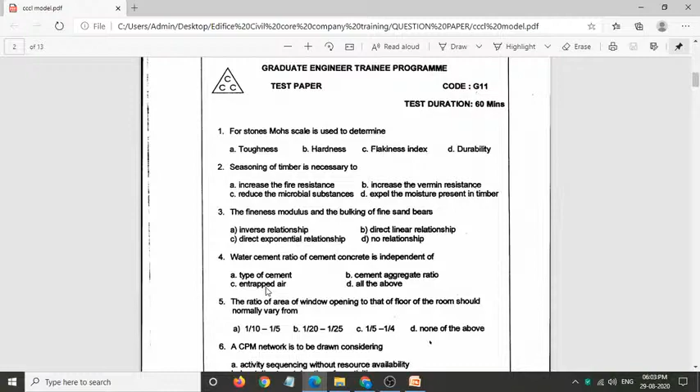So in the written test, I'll show you the company's question papers. They will have multiple choice questions. It is company to company - they will have different patterns, it won't be the same.

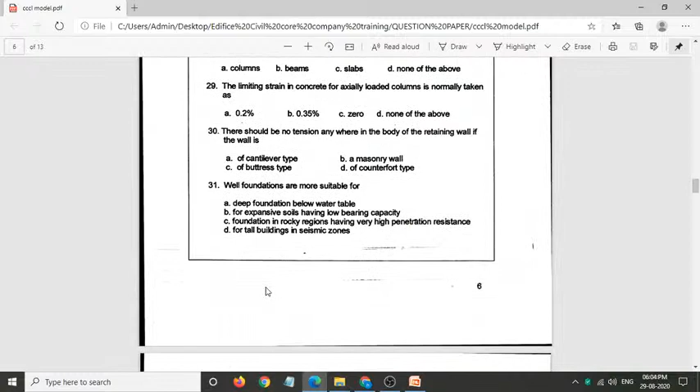So they focus the questions on the type of work they do - that's the main thing you must see. Whatever type of job the company mostly does, they will have more questions in that area. So suppose they're mainly working on irrigation projects, they will have more questions from irrigation and soil structures.

And if you are working on geostructure projects like metro projects, bridge construction works, tunnel boring - for this type of function, soil and foundation will be given most importance.

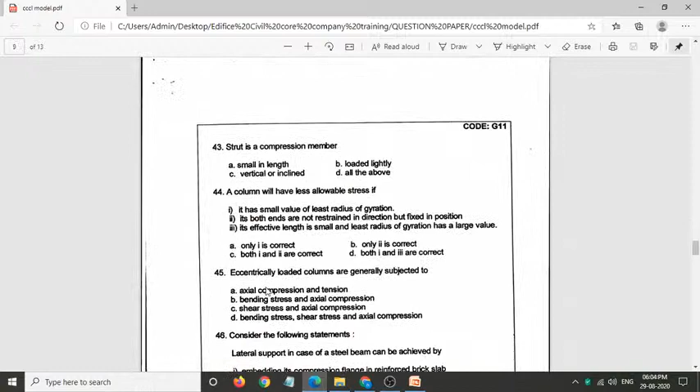So based on this company specification, there will be weightage. So first thing, if you want to get placed into a company, you have to clear the written test. So the first part of the training, we are going to see how to clear the written test.

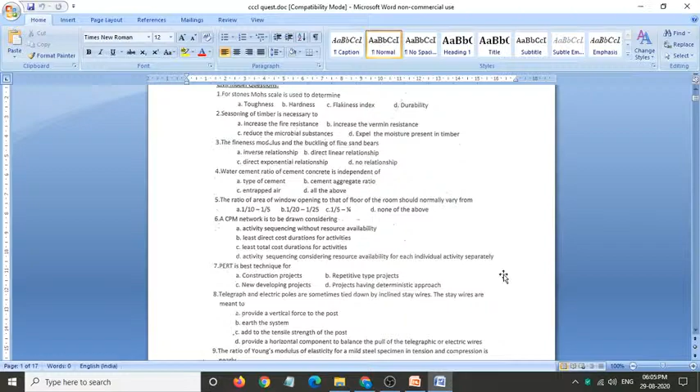What are the things you are going to have to study? So I am showing the model question papers, and these types of questions we will be discussing in further classes also. Objective questions will be asked.

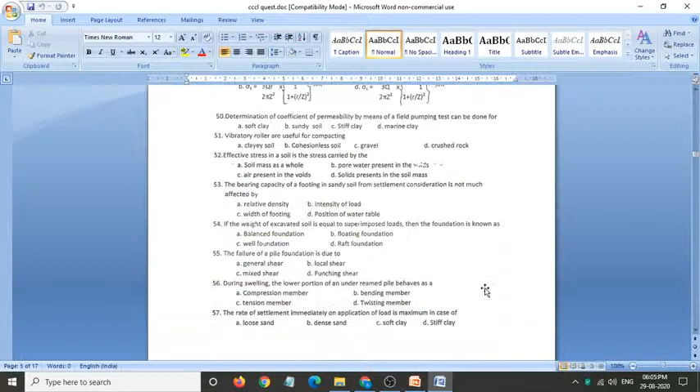Some questions will be direct questions. If you are having 30 or 40 minutes of written test time, there will be direct questions, not much complicated. There will be technically simple answers only. Sometimes you may have one, two, or three problematic questions also, which you have to solve using a formula in one or two steps. So this is one kind of question.

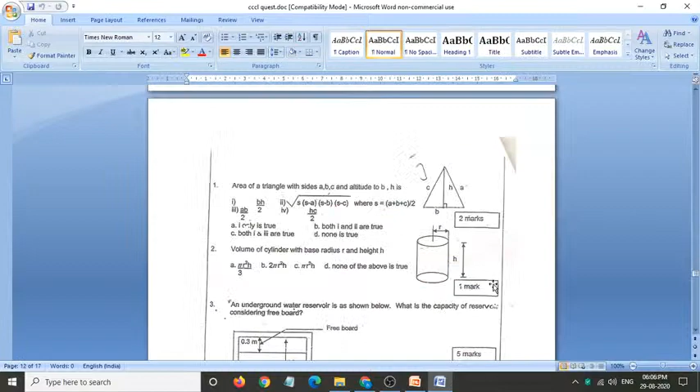Some companies will have around 1 to 1.5 hours. Some companies will have a system test also. I will show you what are the tests and what companies - how their selection process will be, we'll see now. These are the important questions also, frequently asked questions, and some companies' question papers are also available here.

So this is Shapoorji Pallonji's question paper. Why we are showing this before means, you must know the importance of technical subjects, because based on your technical understanding only they will be recruiting. The companies mostly will recruit the candidates who are having very good technical knowledge.

So whoever is strong in foundation, that is basics, only he can able to clear the questions. This is a filtration process. So first round is a filtration process, then another round is another filtration. So they will filter and select the best candidate for the company.

First thing, now we are going to see the pattern of the companies. We have broadly 7 categories, splitted into sectors. In the first sector, we are going to see the recruitment pattern for the service based company. When comparing with IT companies, civil industry also has service based companies, then consultant companies, then product based companies. So in service based companies, nothing but contracting companies.

So these contracting companies, first thing is Afcons Infrastructure. It is allied, a sister concern of Shapoorji Pallonji. So their exam pattern is: first there will be a written test, then a group discussion as second round, third round is a technical round, fourth round is HR round, and the company does not provide any bond.

Then the question paper pattern. Quants will have 15 questions, English will have 20 questions, logical reasoning 15 questions, technical aptitude 15 questions, and technical core 60 questions. Totally you will have 125 questions. Time allotted is 70 minutes, so in 70 minutes you have to complete 125 questions.

It will be a very short duration, not even a minute per question. So the questions will be somewhat easy, most will be direct. Some questions require solving, using formulas. So it will be very tough to complete in this shorter duration. You need to practice more, then only you can clear this sector.

The main areas: strength of materials 5 questions, structural analysis 5 questions, design of steel structures 8 questions, RCC 8 questions, pre-stressed concrete 5 questions, construction materials 5 questions, construction techniques and management 5 questions, estimation and costing 8 questions, soil and foundation 8 questions, surveying 8 questions. So you will get around 65 technical questions.

From the technical part, 60 questions you will get.

Then for the Megha Engineering and Infrastructures Limited companies, the written pattern is also the same. Written test, technical, HR - there is no bond. The salary package is between 15,000 to 25,000.

The selection criteria is you should have a CGPA of 6. In the written test they will ask only technical questions - 45 technical questions, to complete in 40 minutes. It will be slightly difficult, but most questions will be direct with some twist. You must know the concepts well, then it will be easy to solve these questions.

Then the important topics for the technical area: strength of materials 4 questions, structure analysis 4 questions, DSS 4 questions, RCC 4 questions, pre-stressed concrete 2 questions, construction materials 4 questions, construction techniques and management 5 questions, estimation and costing 3 questions, soil and foundation engineering 5 questions, surveying 5 questions.

So these are important topics. Most companies will have similar main topics, but you have to check each and every part, each and every question you must read, then only it will be very important. You must focus on what are the repeated questions and what particular area they are asking questions about. Those questions we will be discussing in a later stage, so it will be useful for your placement drive.

Then the second section is PMC, consultancy companies.

Why we are giving importance to this pattern is, based on the pattern only you can prepare these questions, or else it will be very difficult. If you are very strong in the technical area but don't prepare for quants or communication skills in English and logical reasoning, you will not be selected because of that. So there is a sectional importance for them. Part A will be quants, part B will be technical, so there will be sectional marks. Based on the sections they will be selecting you, so you should give importance to both sections.

Important areas: strength of materials, structural analysis, design of steel structures, RCC, pre-stressed concrete, construction materials, construction technique and management. Here they give more weightage for construction technique and management, estimation and costing, soil and foundation, surveying. You must be very careful because some companies will have a different criteria of selection, giving importance to other topics also. So you must be ready.

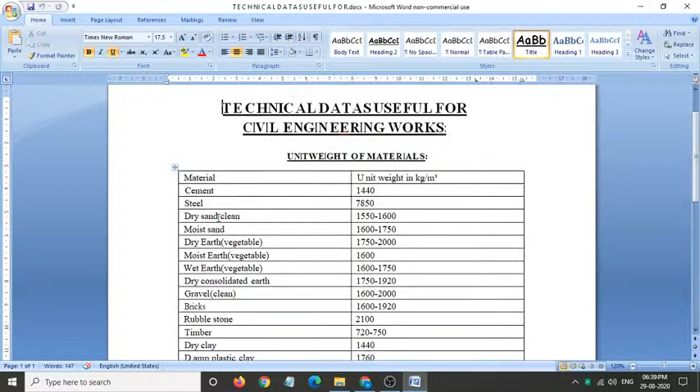For cement, its unit weight is 1440, steel is 7850. These two questions are very important, most of the time they will ask these questions, sometimes in the written test, sometimes in the interview. Surely they will ask: what is the unit weight of cement, what is the unit weight of sand?

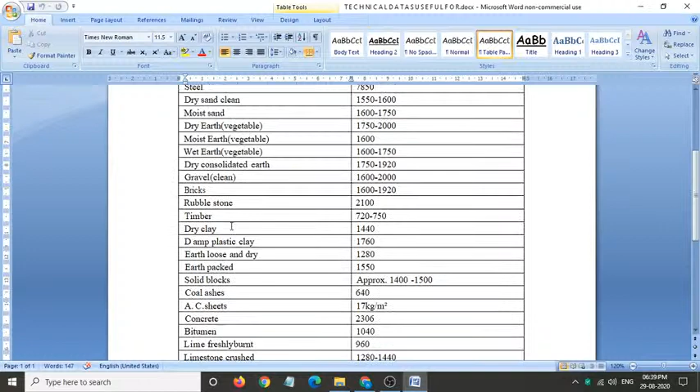Some other values for RCC, steel, solid block you can memorize. For plaster of Paris, you must know 800. For brick, the unit weight is 1600 to 1920. Moist sand is 1600 to 1750, dry sand is 1550 to 1600. Why am I specifically mentioning 4 to 5 items alone? These questions will surely be asked in the interview process, so you must be very thorough with them.

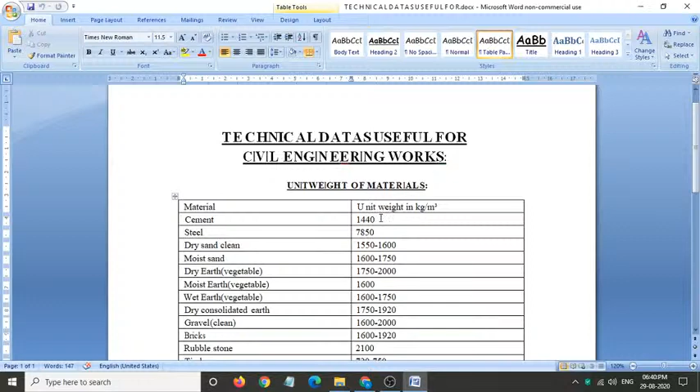If you are not thorough with these values, the technical person, the project manager or senior manager interviewing you will focus on whether you know how to do estimation. By knowing this only we can calculate the values. In the next slide we will see how to calculate the ratios for cement and sand, what quantity is needed. For those things we will be using this unit weight, based on which we can calculate the weight of cement, sand and all. So it's very important.

Next thing I am going to show is an important parameter.

Okay, basics. I'm giving this as a basic title because even if you are going to work at the site, or in an architect office, interior office, or structural office, you must know these notations and commands.

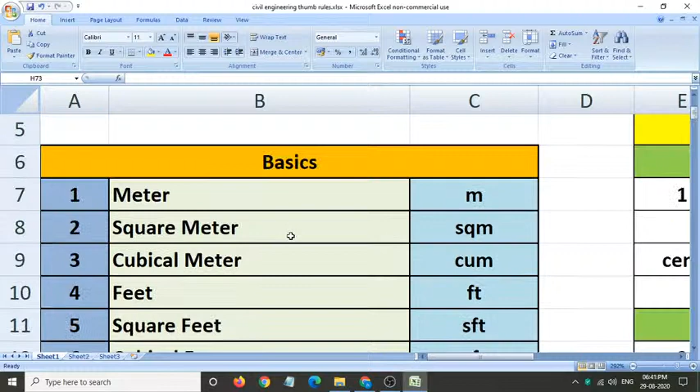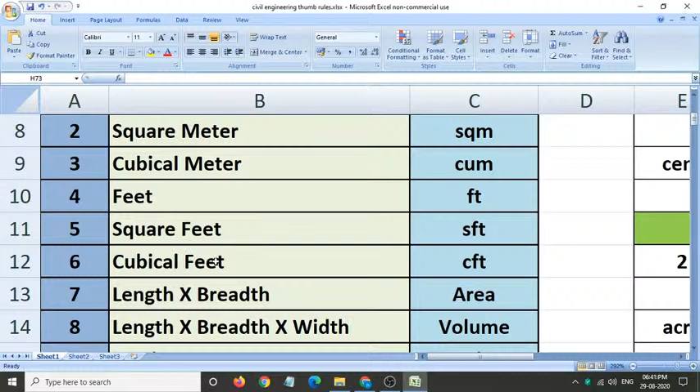Meter notation is M, square meter is SQM, cubic meter is CUM, feet is FT, square feet is SFT, cubic feet is CFT.

You must know the formula for calculating area, length into breadth, and for calculating volume, length into breadth into width. We are not using integration or differentiation for civil applications. We will be using simple addition, subtraction, multiplication only for doing our building works. If you understand the concept, it is very simple and easy.

Sand will be measured in units. Coarse aggregate, that is jelly, 12mm jelly or 20mm jelly or 40mm jelly, is mentioned in units. Random rubble stone is also measured in units.

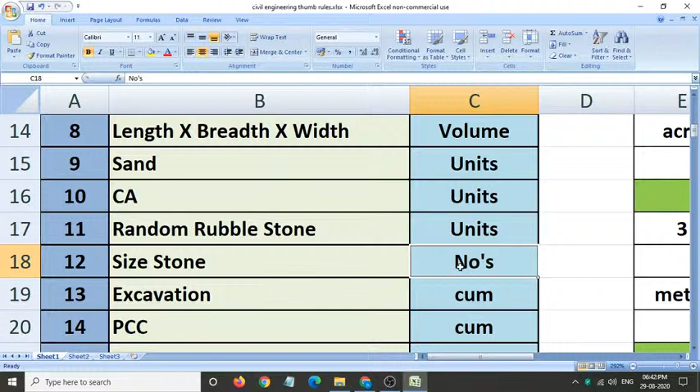Size stone alone will be in numbers, so it is an important one, it will be calculated in number. Excavation is cubic meter, PCC cubic meter, RCC cubic meter, earth filling cubic meter, shuttering square meter, brickwork 9-inch cubic meter.

Brickwork 4.5-inch brick wall, that is partition wall, will be in square meters. This measurement unit is very important. During the written test or technical interview, sometimes they may ask what is the unit of 9-inch brick wall or 4.5-inch brick wall, so you must be very clear.

Sometimes in the interview they will ask you to draw a plan, showing the partition, or they will ask the unit also. These are the important terms you must memorize, because when you enter the field these are the things you must know. Based on this, you can know the unit of measurement.

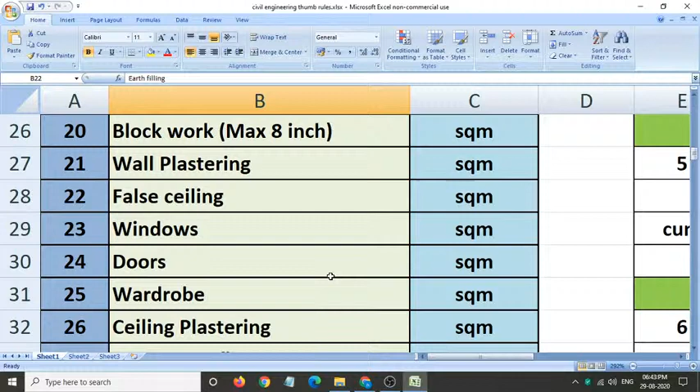Suppose wall plastering, the unit will be measured in square meters. False ceiling square meters. Windows, doors will be taken in square meters. Wardrobe square meter. Ceiling plastering square meter. Waterproofing work square meter. Core cutting work will be done in numbers.

Wall putty work square meter. Primer square meter. Internal painting square meters. External painting square meter. Wall tile work square meter. Floor tile work square meter.

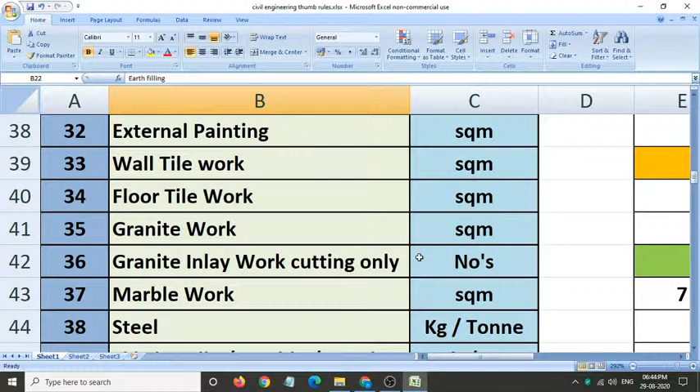Granite work square meter. Granite inlay work, that is cutting using the CNC machine where we do inlay work with designs like flower type or some other design - that charge will be calculated in numbers. Marble work in square meters.

Steel is measured in kilogram or tonnage. Skirting tile, whether in tile, marble or granite, will be in running feet or running meters. For windows, for fresh wood when we get it from the market, it will be calculated in CFT or cubic meter.

Reclaimed wood is nothing but used wood which is already well seasoned. It is obtained from the old market, and calculated in tonnage. The benefit of reclaimed wood is that it is already seasoned - there won't be any bend or cut, so it will be very useful, and there won't be any wastage.

But with fresh wood, the difference is we have to season it first. After seasoning, we have to cut the wood using a cutting machine, and sometimes the wood may bend or crack. Sometimes the trunk may be hollow inside in some part, so there may be losses.

But reclaimed wood is not like that. It is solid wood which was already used in older houses. After demolishing, they are sold in the old market, and from there we can use it. Nowadays architects prefer to use reclaimed wood to also save our environment.

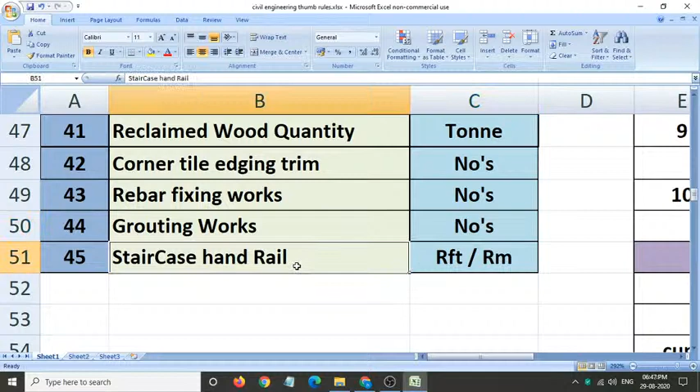Then rebar fixing is done by number. Grouting work is also done in numbers. Staircase handrail is measured in running feet or running meter. Now I will show you on the PPT as well.

So to prevent this, sometimes what we do is, after the concreting work, we insert the dowels using a drilling machine. We drill the space and use chemicals. Epoxy grout is available. Using that chemical grout, we can insert the rebarring works, so these works can be done.

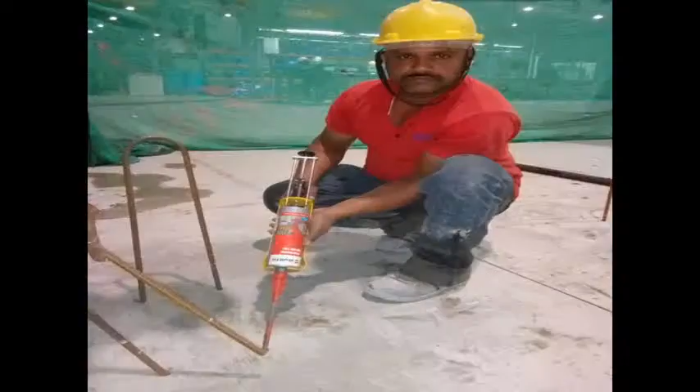So you can see here, some parts the rebar dowels have been left. Some areas we can't leave the dowels, so that's why we are doing this rebar work. The rebar chemical is applied using this injector.

Now waterproofing work. Why we use waterproofing, you can see during the concreting what is the major reason. While constructing the house itself, after de-shuttering you can see that when it rains, the water will seep into the roof slab and penetrate inside the room.

So what is the major reason for this? We do the concreting work in the early morning, sometimes at night, but due to climatic change, the water present in the concrete evaporates. When you pour at 5 or 6 o'clock early morning, there won't be much sunlight, so the evaporation process will be very less, and the heat of hydration is not normal, so the water won't evaporate.

As time progresses, after 9 or 10, crossing to 12 o'clock, at that point when we are putting the reinforcement and shuttering, it will already be heated. We pour water before laying the concrete, but even then when laying it, there will be extra heat, and the water will be evaporated. Because of that there will be improper curing, shrinkage, and heat of hydration issues - this is one technical part.

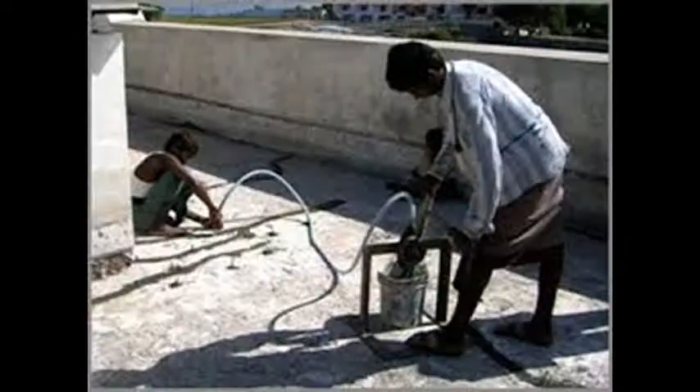So when waterproofing work is done inside the room, suppose if they observe a crack on top of the roof slab, we have to do the work on the top of the roof slab also. We have to chip the area, keep our nozzle there, cover the cement paste, then pass it using the pressure grouting method. You can grout it. So these are the methods.

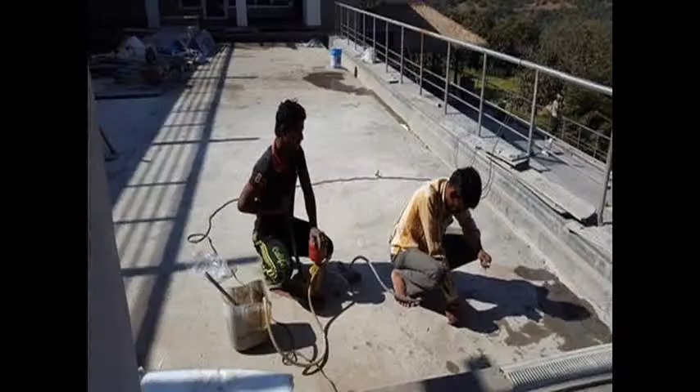So I have given you some introduction. These concepts are very important. Now we are going to the conversion part. Conversion is very important, and I'll tell you why we give so much importance to it: you will get questions from this conversion topic. At the same time, in a face to face interview, you will be asked these questions. Sometimes they may give you a square feet area or a plan and ask you to calculate. So these kinds of questions are there.

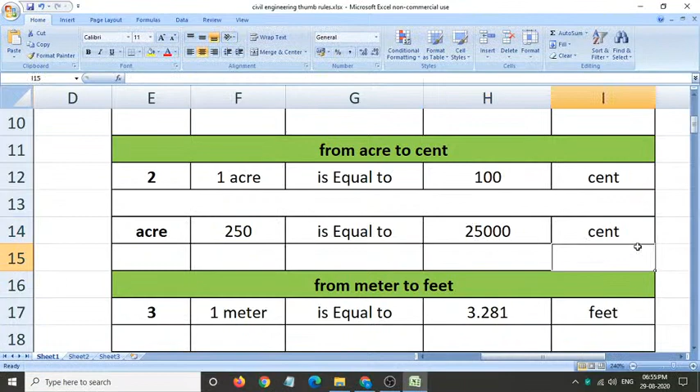So the next one, we are converting meter to feet. 1 meter is equal to 3.281 feet. This is a very important value - 1 meter is equal to 3.281 feet.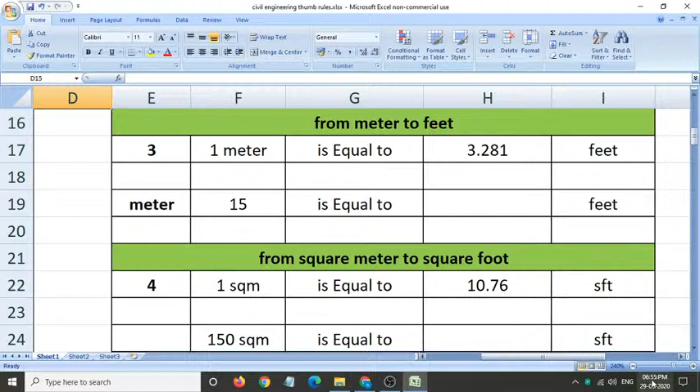Then I want to explain one important topic here - this is a standard value. We know 1 meter is equal to 3.281 feet. Now, 1 square meter equals how many square feet? If you know this value, we can calculate that. Then what is 1 meter cube equal to in CFT, we can also easily calculate. For this, I am going to do 3.281 into 3.281 - you just need to multiply this value, square it, and that gives you the answer. So 1 square meter equals 10.76496 square feet - you can see the value 10.76.

Then 1 cubic meter equals how many CFT? For this, 3.281 into 3.281 into 3.281 - you need to multiply it thrice, and you will get 35.319. I am rounding it off, so if you round it off, you get 35.315. So this is a simple conversion - if you know 1 meter is equal to 3.281 feet, you can calculate square foot, then cubic feet. This is very important because when you are working at the site, most of the measurements will be in meters.

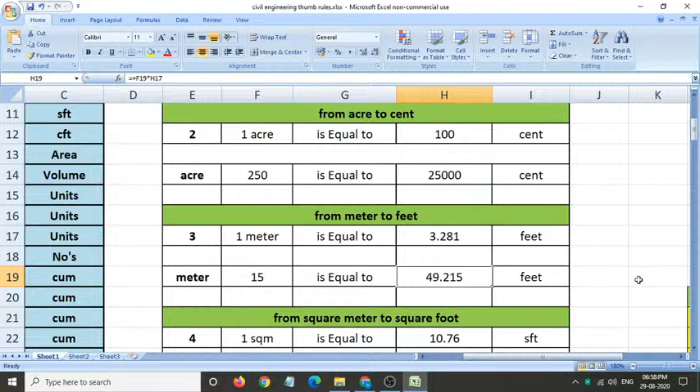These kind of questions will be asked in the written test too - 15 meters is equal to how many feet they will ask. There will be values around 50 feet, 49 feet, 49.21 feet, and another 60 feet. So we can calculate 15 into 3.281. If you know this value, just multiply it by 15, you get 49.215 feet. It's a very simple calculation, but these calculations are very important. You must know these thumb rules for executing work at the site. If you don't know this, it is very difficult to survive in the construction field.

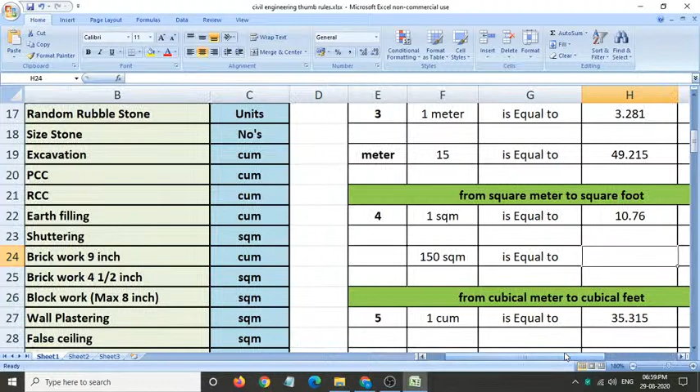Next one is 1 square meter equal to how many square foot? 1 square meter is equal to 10.76 square foot. We have already seen the conversion here. So now I know 1 square meter is equal to 10.76.

So if I have 150 square meters, how many square foot is that? I am multiplying 150 into 10.76, you will get 1614 square foot.

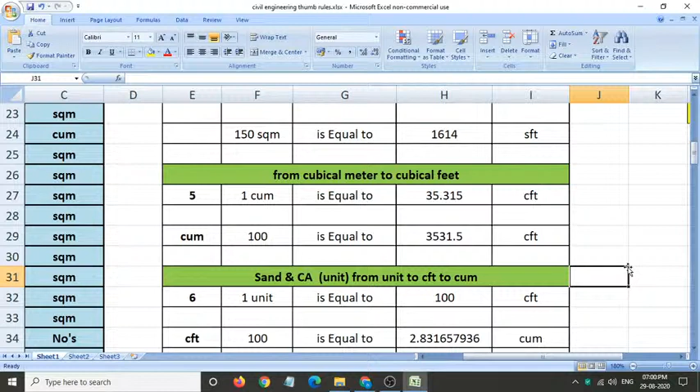Now 1 meter cube is equal to 35.31 CFT - this is the cubic feet value. So then 100 meter cube is how much CFT? Again I am multiplying 100 into 35.315, it is 3531 CFT. This is a very simple calculation; based on this we can easily calculate.

Then another very important calculation is sand, fine aggregate and coarse aggregate. In the market, fine aggregate and coarse aggregate are usually measured in units. So from units, if you want to know the value in cubic meters, you have to convert the value from units to CFT, then from CFT to cubic meters.

So now I am converting. I have taken the first value as 1 unit. This is a standard formula: 1 unit is equal to 100 CFT. This is a standard value. So 100 CFT is equal to - I will show you - 100 divided by 35.315, it is in CFT, and I am converting to meter cube, it is 2.831 cubic meters.

At the same time, now I have received 6 units of sand and I have to convert it to cubic meters. So 6 units I am converting to CFT is 600 - 6 into 100 is 600 CFT of sand I have. We have the formula CFT divided by 35.315, and we can calculate how many meter cube of sand we have received. So 600 divided by 35.315, we get 16.98 meter cube of sand we have received.

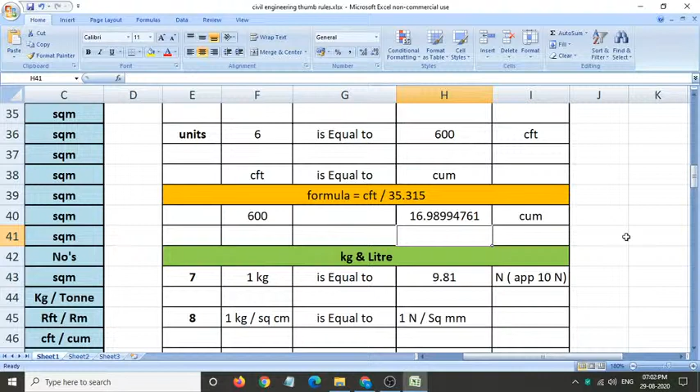Then another important one is kilogram and liters. These are standard formulas, there is no change, you need to just memorize these values. So 1 kg is equal to 9.81 Newton - approximately we can take it as 10 Newtons, so there is no issue, it will make the calculation also very easy.

Then 1 kg per centimeter square is equal to 1 Newton per square millimeter. Then 1 kg is equal to 1 liter. Then 1 cubic meter is equal to 1000 liters. So these are standard values.

So I am giving one example for this, because usually in a residential project, in a septic tank or water tank, we will be constructing rectangular water tanks, so we'll be calculating the water for that. For calculating the capacity of the water tank, we use this formula - based on this we can find out the capacity. For better understanding, I have taken a water tank dimension of 1.5 meters into 2 meters into 5 meters - this is the size of the water tank. First I want to know the volume, which is equal to cubic meter, as all the units are in meters.

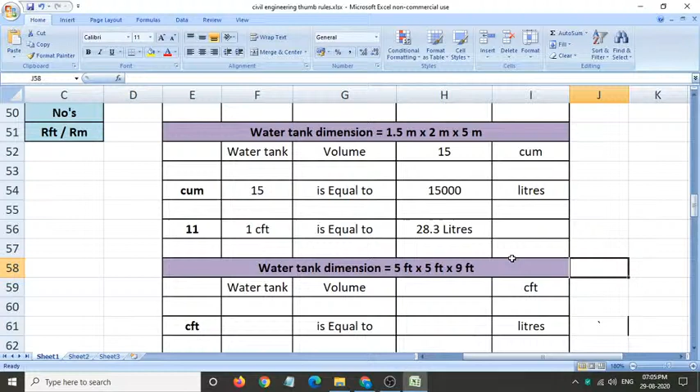It is very important. Now the next one is in meters, we calculated that way. What about if the value is given in feet? 1 CFT is equal to 28.3 liters. Now, for your understanding, I am using a water tank dimension of 5 feet by 5 feet by 9 feet.

First I am calculating the volume. Here the unit is in feet, so it is cubic feet. 5 into 5 into 9 is totally 225 CFT, which is the capacity of the water tank.

Now I am converting the CFT into liters. We know 1 CFT is equal to 28.3 liters. So 225 CFT, multiply it by 28.3, and I get 6367.5 liters. This is the capacity of the water tank.

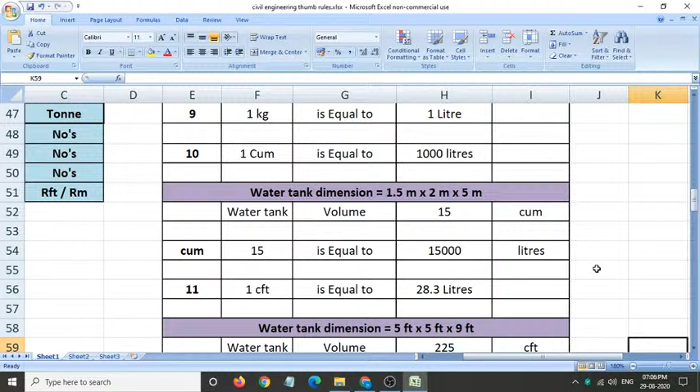So now we have seen how to calculate the volume and convert from m cube to liters, and CFT to liters, with examples shown. This is very important. Wherever you are working, in a real estate firm, construction firm, contractor side or PMC side, you will be using this formula. Very important, you must know this conversion. That's why we have given it as a topic under technical aptitude. Most students are not able to get the job because they don't know this feet conversion, meter conversion, or what is acres to cent.

These are very important. Next, from acres to square foot, we are converting acres to square foot. We already know 1 acre is equal to 100 cent, and we have already studied 1 cent is equal to 435.6 square foot.

1 acre is equal to 100 cent. 1 cent is 435.6 square foot. So now I am multiplying: 100 cent, how many square foot will it come? 100 into 435.6, I will get 43,560. So 1 acre is equal to 43,560 square foot.

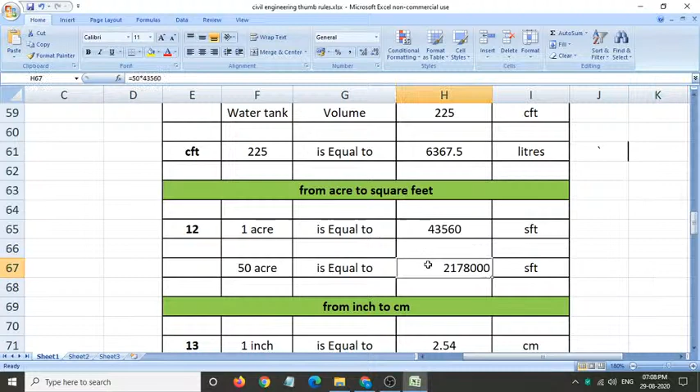This is a very simple basic conversion. If you know this, you can convert acres to square foot. It's very important, what I am teaching in these conversions. From inches to centimeter, 1 inch is equal to 2.54 centimeter. Most of you know this. Now, 6 inches is equal to how many centimeters?

Just you need to multiply, so it's totally 15.24 centimeter. We hardly take it as approximately 15 centimeters when working at the site. We will be taking approximate values only, because we can't take minute values for all calculations. So 6 inches, for calculation we take 2.5 centimeters as 1 inch. So 4 inches consists of 10 centimeters, and 6 inches means 15 centimeters. This is the way we will be taking it. For exact calculation, we can take the precise value.

Then from inches to feet: 12 inch is equal to 1 feet. Now, 1 inch is equal to how many feet?

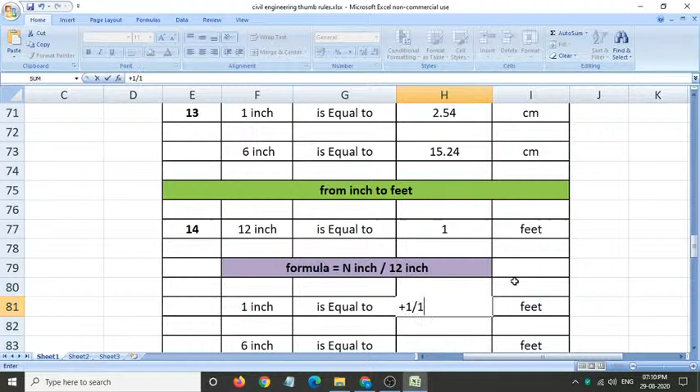So there is a formula to calculate. N inch is nothing but how many numbers. 1 inch is divided by 12 inch, you will get 1 inch square feet. So now I'm going to find out how many square foot in 1 inch. 1 divided by 12, I will get 0.0833 feet.

In the same case, I'm going to calculate for 6 inches. How many square feet? 6 divided by 12, I will get 0.5 foot. Now I take it as 56 inch. 56 inch divided by 12, 4.66 feet. Approximately you can take it as 4.67 feet. So 56 inch is equal to 4.67 feet.

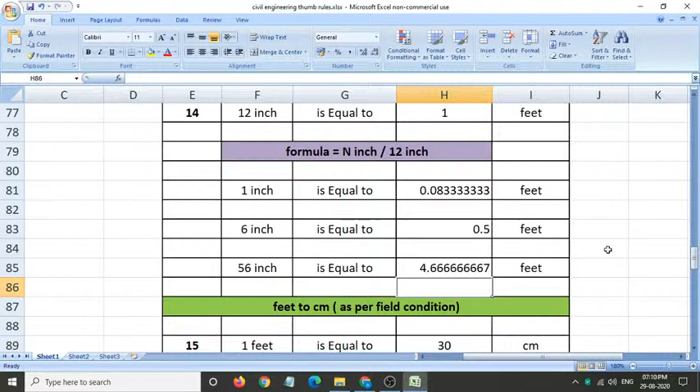Why this conversion, inches to conversions and all, we are deeply covering it. Because when you are working at the site, you need to give instructions to the laborers in feet and inches only. So that's why we give more importance to this. Then whenever you go for the interview, they will ask questions from these areas. So it's very important, so please keep all this point very thorough.

Then feet to centimeter, as per site condition, 1 feet is equal to 30 centimeter. We take approximate as 30 centimeter. So 80 feet is equal to how many centimeters? 80 into 30, it is 2400 centimeters. 80 feet is equal to 2400 centimeters.

Now, actual scale is another important question. If you are measuring in a scale, if you take a 1 feet scale and measure, if you exactly check, you will see 30 centimeter. 1 feet scale, if you take and measure, you will see 30 centimeter plus 5 millimeters will be available. Small 5 lines will be available.

So whenever you are going for the interview, if the interviewer asks the question, how many centimeters are there in 1 feet scale, the exact answer is 30.5 centimeters. But in our site condition, we will measure 1 feet as equal to 30 centimeter. We will give a 5 mm allowance.

In our construction field, we are dealing only with humans. There will be some human errors. We are minimizing the errors up to an allowance of 5 mm. So we are not working like a product, or using machines to build the same product. We are not using any computer designs for developing the same prototype model. So here we will be working all with the physical and man. Most of the 90% of work will be done by the man. So the product will not have 100% accuracy. We cannot give that. We will give 90 to 95% accuracy only. So you should know this thing. Don't compare between the other things also.

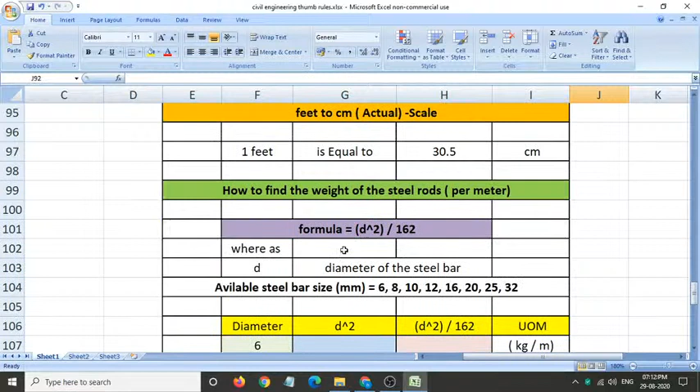Now how to calculate the weight of the steel rod? This is another important question. Even when you are working as a BBS engineer, or calculating the steel quantity, it is very important. First of all, you must know the available steel sizes in the market: 6, 8, 10, 12, 16, 20, 25, 32. These are the available sizes.

For calculating the weight of the steel bar, we use the general formula, d square divided by 162. D square by 162, it is a simple formula. Everyone can easily remember, d square by 162.

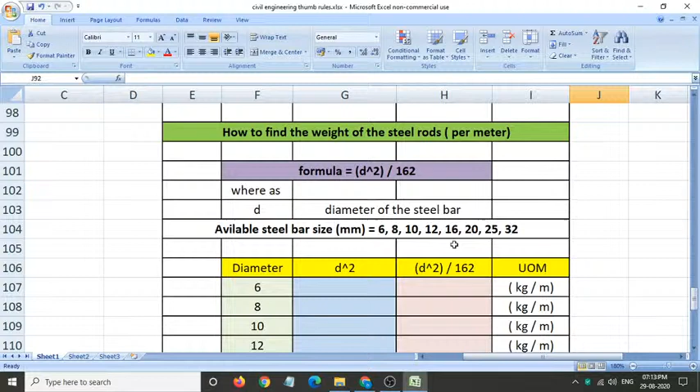So now we are going to see, I am going to calculate per meter steel rod weight, the weight of the steel rod per meter. So for 6, I am taking a 6 mm dia bar. 6 into 6, I am calculating first the d square value: 36. Next, first of all I calculate all the d square values, then I will calculate for the rest. Then 8 into 8, it is 64.

10 into 10, 16 into 16, 20 into 20, plus 32 into 32. So now I have calculated all the d square values.

Now I am going to calculate using the formula d square by 162, so I will get the per kg per meter weight. So weight of the steel bar per meter length I will get. D square divided by 162, the weight is 0.22 kilogram per meter. 6 mm bar weight per meter is 0.22.

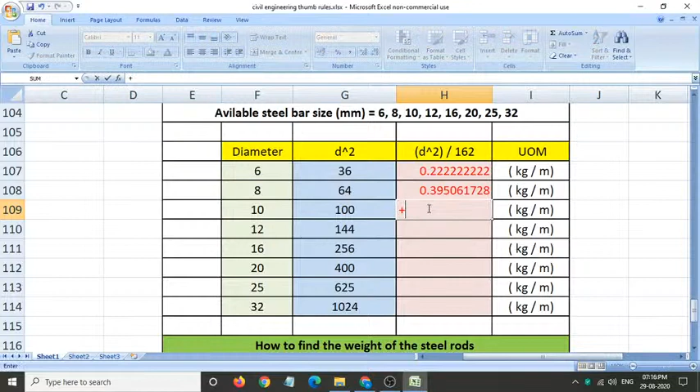Now for the 10 mm dia bar, d square divided by 162, its value is 0.6172 kg per meter. For the 12 mm bar, you can find 0.889. For 16 mm bar, 1.580 kg per meter. 400 divided by 162, you get for 20 mm bar weight 2.46 kg per meter. For 25, you get 3.85 kg per meter. For 32 mm bar, you get a weight of 6.320 kg.

Now what we are seeing, we have got the value of per meter length of the bar. So usually in the market, the total length of a steel bar is 12 meters. Only Tata Steel will have exactly 12 meters. Other brands will be lighter, shorter than 12 meters. In feet, approximately 39 feet. So 12 meters is the standard size of the steel bar. Now we are going to calculate

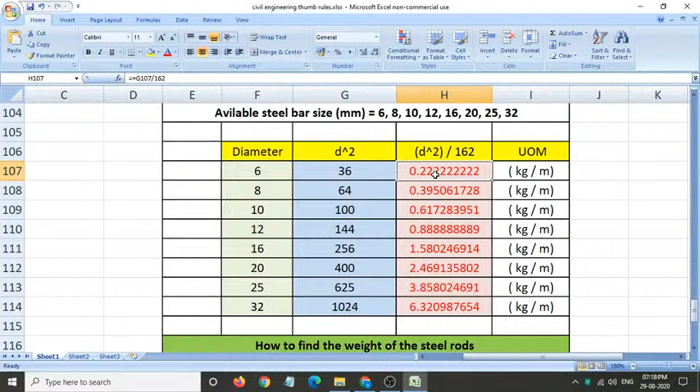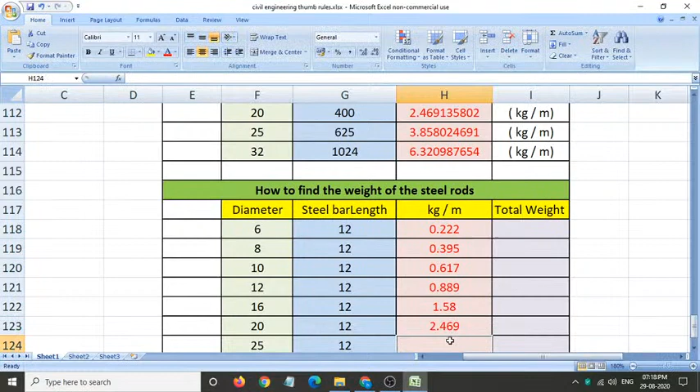for 12 meter length. So we know the per meter length value: 0.222, 0.395, 0.617, 0.889, 1.580, 2.469, 3.858, 6.320.

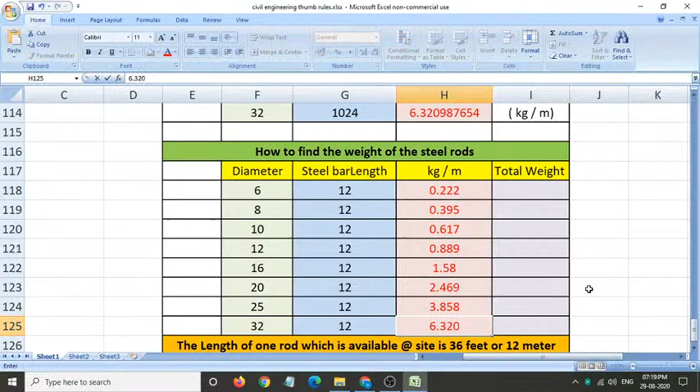So we have already found the per meter length of the steel weight. Now we are going to multiply that weight by 12 meters, so we will get the total weight of the steel bar. So for the 6 mm bar, 12 into 0.222, you get total weight: one steel bar of 12 meter length, 6 mm bar weighs 2.664 kg.

For the 8 mm bar, total weight is 12 into 0.395, it weighs 4.74 kg. 10 mm bar weighs 7.404 kg. 12 mm bar weighs 10.668 kg. 16 mm bar weighs 18.96 kg. 20 mm bar weighs 29.628 kg, approximately equal to 30 kg, one steel bar weight. 25 mm bar weighs 46.29 kg. 32 mm bar weighs 75.84 kg.

So the length of one rod available at site is 36 feet or 12 meters. These are the conversions, very important conversions. You must learn these conversions and keep them in your mind.

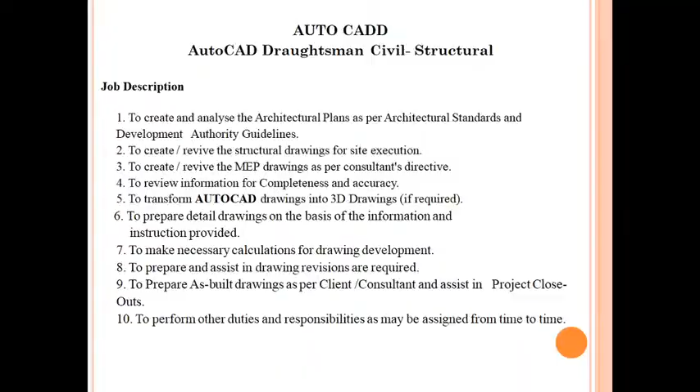Then you must know basic Vastu at least, because many Vastu specialists will say one thing, but what is important is what are the main things you must know. Then interior design - if you are doing an interior designer job and going to work with Revit Architecture, using the software you can get up to 40 to 45 percentage of realistic views, but it will not give 100 percentage realistic view.

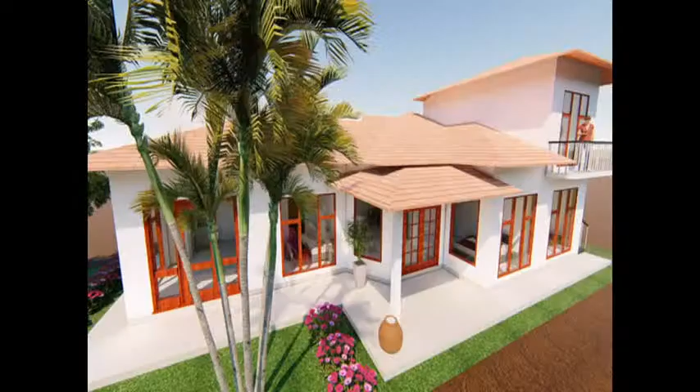So these are external views using the Revit software, these are the outputs. Then SketchUp - using SketchUp you can get up to 60 percentage of realistic effect. Using the SketchUp render engine you will get this kind of output, interior and exterior views.

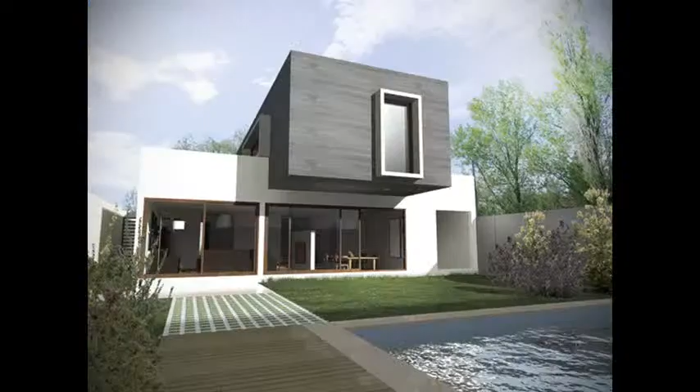Then suppose you are using Revit with Lumion, or SketchUp with Lumion, you will get this kind of realistic image, up to 70 to 75 percentage realistic we can able to achieve. But when you are zooming it, you can know by itself it is a rendered image, it is a little cartoonistic also.

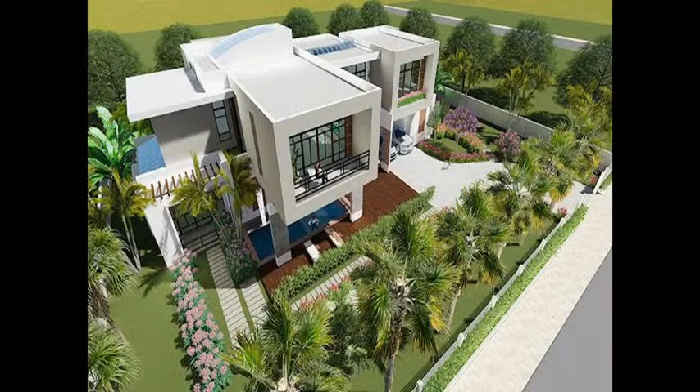Then we are coming to the most powerful tool, 3ds Max. With this software, there are two combination softwares, and using these combination softwares you will get very realistic images. So this image is not a photograph, this is a rendered image, you can see the reflections also, how they are given.

So the interior designer must work more detailed - how the detailing is given, how realistic you make it is the work you are doing, and based on that only your salary package will be decided. I have shown this image - if you are able to replicate this kind of images, you can do this kind of work, your starting package will be around 40 to 50 thousand if you are able to give it. You must know 3ds Max, V-Ray, Photoshop - this one combination.

We have another powerful render engine I will tell you about. V-Ray is a powerful render engine which gives very realistic images. At the same time we have another software, Corona - it is not a coronavirus, we have a software called Corona render engine. It is also a powerful tool which gives similar type of views like V-Ray. So these two softwares are very important, don't confuse that coronavirus with this, this is just one of the names, Corona software rendering engine is also available, and you also have market openings available for this.

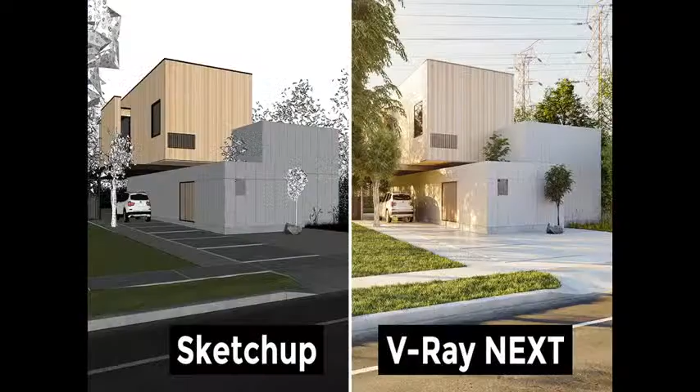These are exterior images. I've given a comparison between SketchUp and V-Ray. Next is an advanced version; you can see how realistic the images are. When comparing SketchUp alone render with the same image, it's not as realistic as when compared with V-Ray Next Render. So V-Ray is a powerful tool for realistic images.

If you know this software—3ds Max, V-Ray, or SketchUp with V-Ray, then Photoshop—you'll get a higher package. But you must work in great detail; only then can you get high salary packages.

Now I'll show you the BIM sector. If you're going to work in BIM, what software must you know? Everyone already knows what BIM is—Building Information Modeling tool, used in architectural, engineering, and construction works.

Before executing any work, using BIM we can find any clash detections available, and based on that modify things during construction. If you find clash detection later, modifying it is very difficult. So when designing itself, we can assess any problems or issues and rectify them at the designing stage itself. Building Information Modeling is very useful for us.

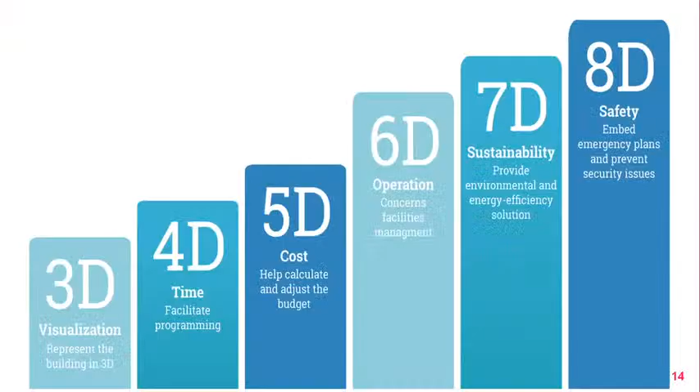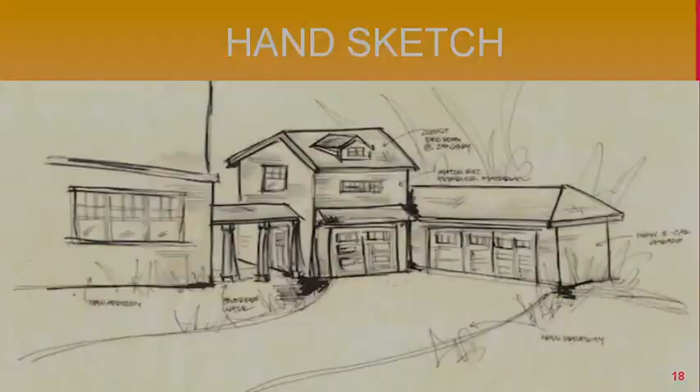Then BIM came—ArchiCAD was the first BIM software. From then, Autodesk started this work. Now for BIM 3D, you must know these softwares: AutoCAD, AutoCAD Revit, Revit Structures, then MEP, Navisworks. Using this, BIM 3D can be done.

Then BIM 4D—for 4D you need AutoCAD, Revit Structures, Revit Architecture, Revit MEP, Navisworks, MS Project, Primavera—either one you must learn. 4D means you'll be using the schedule. 5D is cost—using MS Project and Primavera you can do those things.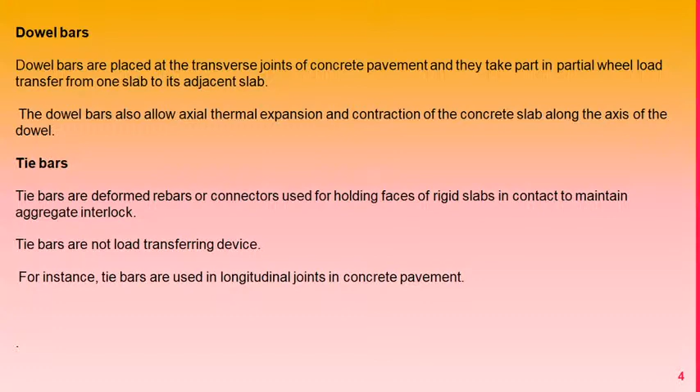As for tie bars, they are deformed bars or connectors used for holding the face of adjacent slabs in contact to maintain the aggregate interlock. Tie bars are not load transferring devices. For instance, tie bars are used in longitudinal joints in concrete pavement.

See, this is called a dowel bar, and these are called tie bars. So in this diagram you can see the surface texture. Tie bars are laid in the longitudinal direction, and transverse dowel bars will be laid.

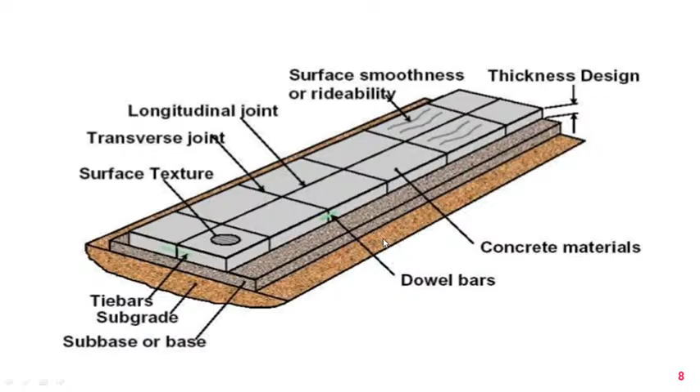Mostly this is all in the concrete pavement of highway projects. So advantages: dowels and tie bars significantly improve the performance of the pavement joint, although they increase the initial cost but reduce the life cycle cost.

So you must be very prepared, these are very important questions. Sometimes in the face-to-face interview they will give a paper and ask you to write the process of cement manufacturing. So you have to write the process just as a flow diagram, and they will ask you to explain it.

Sometimes they will ask you to draw a house plan, sometimes they will give a plan and ask you to fix the columns, mark the column places. So these are the types of questions that arrive in face-to-face interviews. Everyone may not face the same questions, each person may get different types, but you must be well prepared to attend these questions.

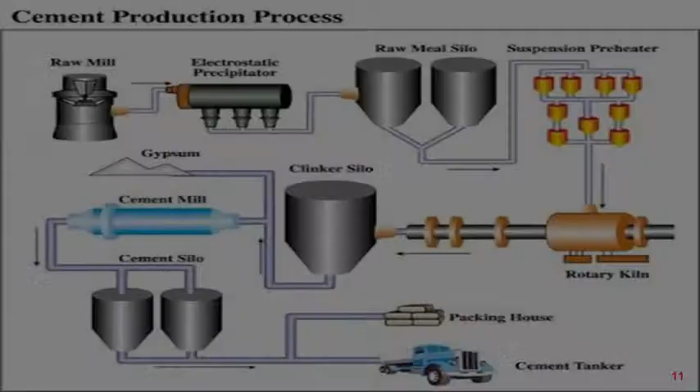So for cement products, if they ask for the manufacturing of cement, you already know, just use the flow diagram so that you can answer easily and your time will also be saved. So how fast you give the answers is more important.

If your answer is satisfactory, they will ask more questions. If you are a very good candidate, on the spot itself they'll let you know whether you are selected or not. Some students may not know the results immediately. If the interviewer is satisfied, you will know the results on the spot, they will tell you they are going to select you. So it's very important, at the time of the interview itself you can judge whether you are selected or not.

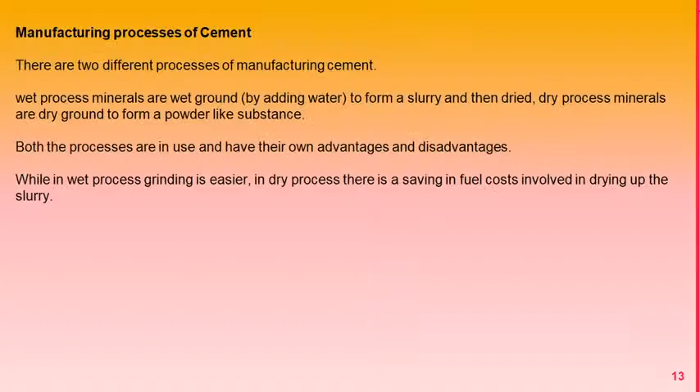So manufacturing process and all you already know, I am just explaining the process with important questions only. Dry cement process and wet process, you must study.

The difference: in the wet process, the mixture of raw material is washed in the wash mill with 35 to 50 percent of water. Materials exiting the mill are called slurries, which have flowability characteristics. The size of the kiln needed for manufacturing cement is big. Raw materials can be mixed easily, so a better homogeneous material can be obtained.

Fuel consumption is high, that is 350 kgs of coal per ton of cement produced. Cost of production is high, and capital cost is comparatively less when using the wet process.

In the dry process, the raw material is blended in a dry state. The dry materials exiting the mill are called kiln feed.

The size of the kiln needed for manufacturing cement is small, and it is difficult to control the mix of raw materials, so it is difficult to obtain a better homogeneous mix.

Fuel consumption is low, that is 100 kgs of coal per ton of cement production. Cost of production is less.

The capital cost is high due to the blending required, so wherever it is lower, we will be using the wet process only. So these questions will be arising, so you must be very careful.

Another important question is: what are the different types of cement? These different types of cement questions will be asked frequently.

So rapid hardening cement, then Portland Pozzolana cement - these are important types of cement. Sometimes the interviewer will ask about specific properties, so you must know one or two properties of each cement. For rapid hardening cement, you must know where it should be used and what the purpose is. It is mainly used in the colder regions.

Then Portland Pozzolana cement, PPC, is generally used in local construction. Then ordinary Portland cement - there will be another question also: what is the difference between OPC and PPC? OPC is ordinary Portland cement, then PPC is Portland Pozzolana cement.

The major difference is the initial setting time - we can attain it earlier in OPC, but when we go to PPC, the early strength will be low, but the highest strength we can achieve at the later stage of PPC.

So in the cube test also, when we are testing, sometimes the 7 day strength will be very less for PPC compared to OPC, so we need to give some time when using PPC. So with time taken, we can achieve it - sometimes it will attain 100% after 28 days also, but in some cases the cube test will fail.

Sometimes when using the cube in the field, we have observed at certain stages the 7 day strength can achieve 100% also, but sometimes with the same cube, when testing at 28 days, the cube may fail. What is the major difference?

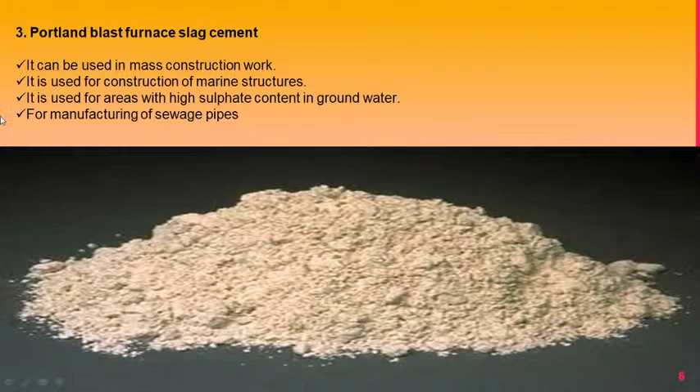Then Portland blast furnace slag cement, then super sulfate resisting cement - these are used in areas near the seashore. Then low heat cement is used in gravity dams, in hotter regions.

Then white cement used for joining marbles, ceramics, and sanitary wares. Expansion cement is used for repairing grout cracks and grouting of anchorage bolts. So these are the two application properties you must know.

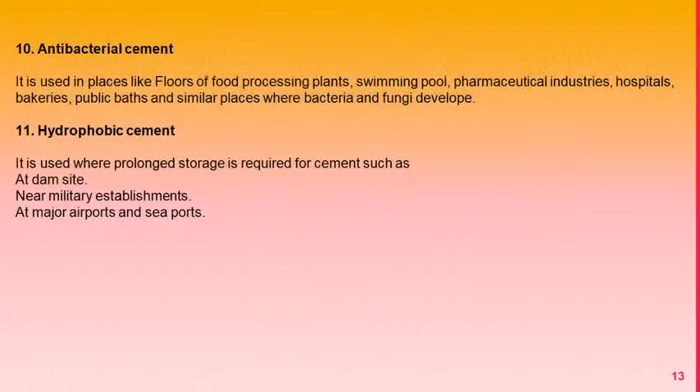Then masonry cement used for rubble masonry and jointing brick. Ordinary Portland cement we already discussed. Then antibacterial cement, then hydrophobic cement - these are the important questions in this sector.